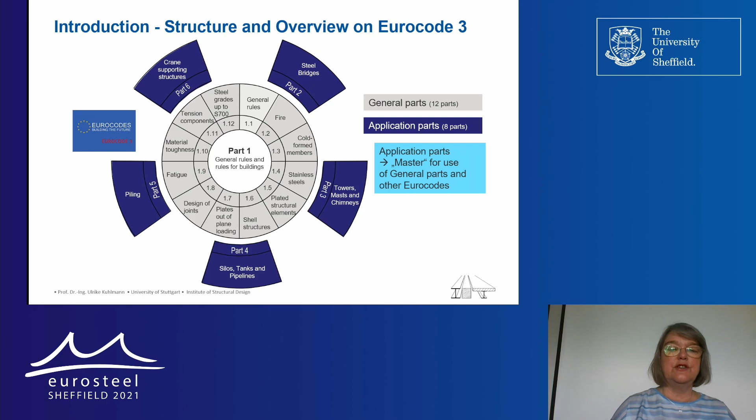This gives you an overview of the structure of the existing Eurocode 3. There are 12 general parts, for example part 1.1 on member stability, or part 1.8 on design of joints. And there are 8 application parts, for example part 2 for steel bridges. The application parts form a kind of master for the use of the general parts and of other Eurocodes, such as Eurocode 1 for loading.

Let's come to the aims of the revision, and this, of course, not only for Eurocode 3, but for all Eurocodes. First of all, we want to include the latest developments, that is, new materials, new products, new methods, and new market requirements, and for that it needs an extension of the existing rules. Secondly, we aim at improvement and harmonization of existing rules. This is expressed by the term reduction of nationally determined parameters, or NDP.

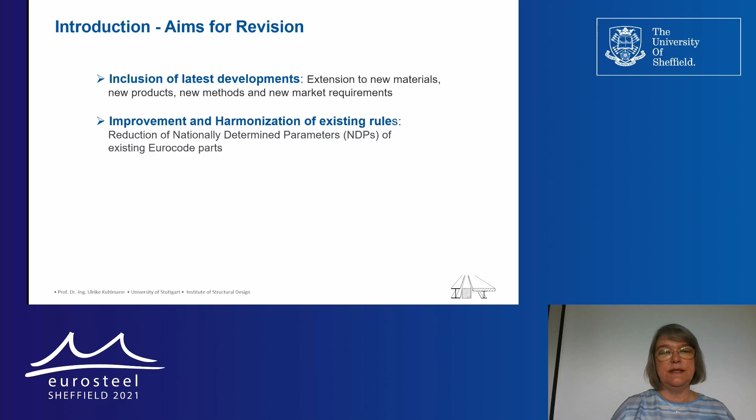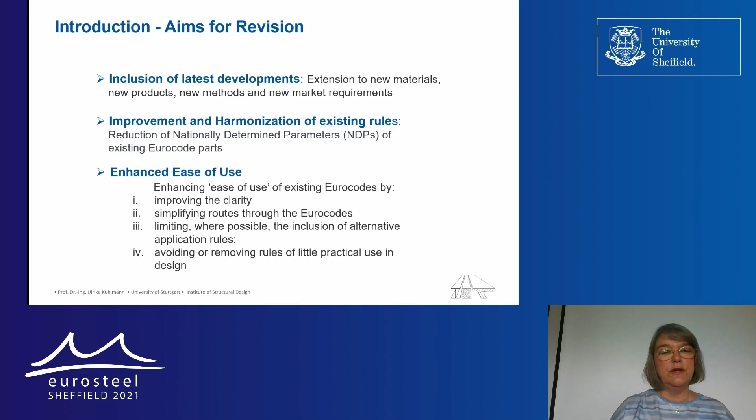And thirdly, and I think this may be the most important one, we want to achieve an enhanced ease of use of the existing Eurocodes. For example, by improving the clarity, by simplifying the routes through the Eurocodes, limiting where possible the inclusion of alternative application rules, and avoiding or removing rules of little practical use in design.

Let me give you some examples. So the existing part 4.3 is on pipelines, and we have decided to withdraw this part. Why? There are many other EN standards for pipelines with more specific purposes, and it really seems that this standard is not much used.

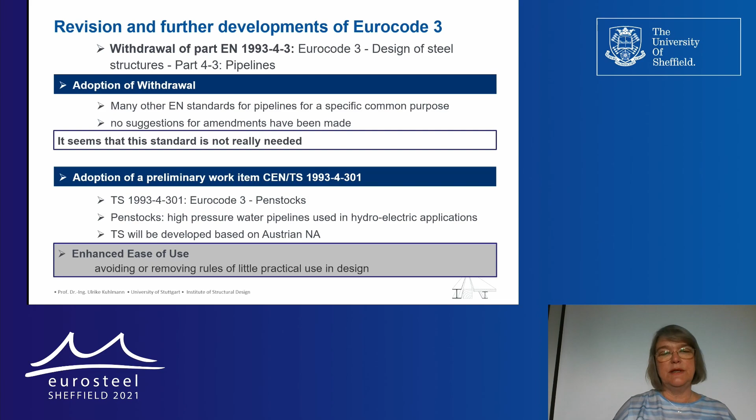However, when we decided to withdraw part 4.3, it was found out that there is at the moment a national annex from Austria where there is content which is really of use. The content concerns penstocks, high pressure water pipelines used in hydro-electric applications. This, of course, we try to keep, and for that we identified a technical specification to contain this new content. So we enhanced ease of use by avoiding or removing rules of little practical use, but at the same time we try to keep valuable content.

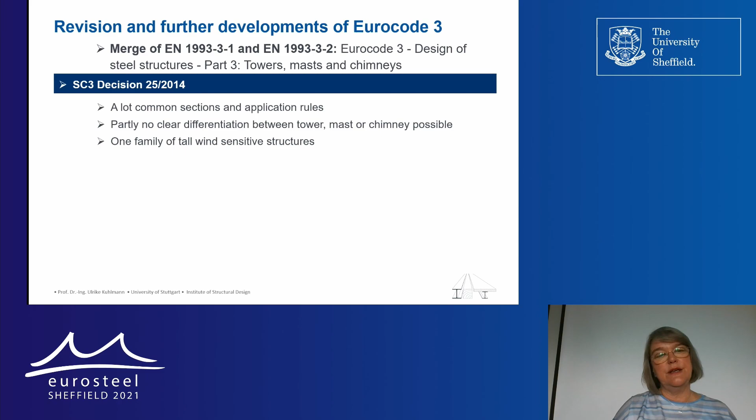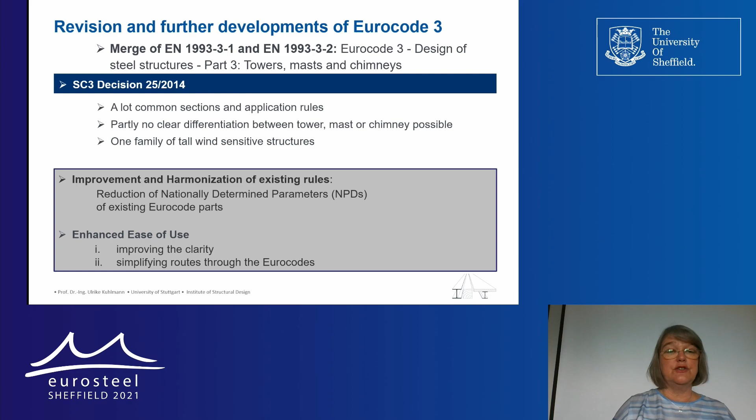Second example is the merge of Eurocode 3 part 3.1 and part 3.2. The idea is to have one single part: towers, masts, and chimneys. Why? There are a lot of common sections of these two parts, and it is not a clear differentiation between the tower, mast, and chimneys. So it makes much more sense to have one family of tall, wind-sensitive structures. This is, of course, an improvement and harmonization, also a reduction of nationally determined parameters, and an enhanced ease of use.

The third example concerns part 1.12. Part 1.12 at the moment gives additional rules for the extension of Eurocode 3 up to steel grade S700. We decided to dissolve part 1.12 and integrate the content into part 1.1, part 1.5, etc. So, for example, part 1.1 has been adapted with requirements on ductility and for plastic design, and there has been an extension of buckling curves. This is, for sure, again an improved clarity.

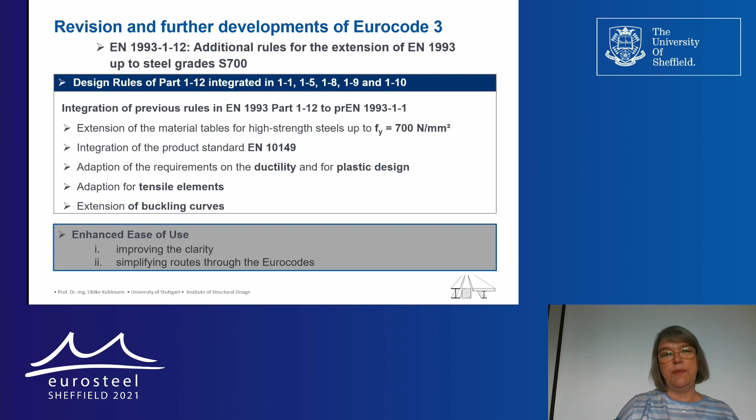However, when we had decided to dissolve part 1.12, we identified a new need. There is a new high-strength steel up to S960 where rules are missing. So we decided to have a new scope and a new title for Eurocode 3 Part 1.12, allowing for an extension of the rules for steel grades stronger than S700 and up to S960. With that, of course, we also allow for the latest developments, and we open the door really for this new material.

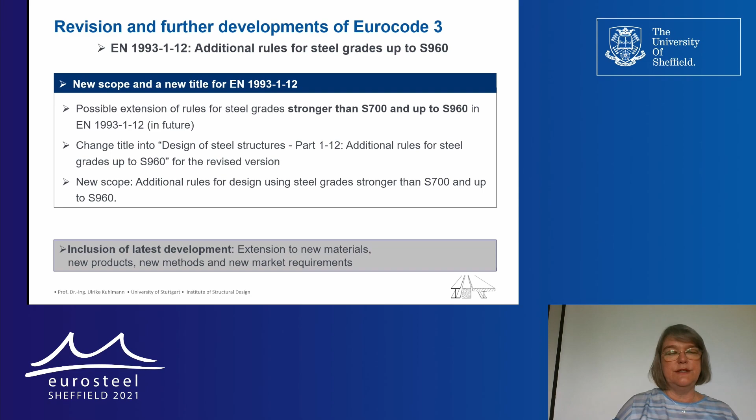Let me explain a little bit on the organization of Subcommittee 3. Subcommittee 3, within the family of TC250, is responsible for Eurocode 3, design of steel structures. Within Subcommittee 3, we have identified for each of the single parts of Eurocode 3 an individual working group.

So, for example, there is working group 1. Convener is Bert Snijder from the Netherlands, who deals with Eurocode 3 Part 1.1. Or there is working group 5 dealing with Eurocode 3 Part 1.5, and I'm convener of that. The task of this working group is technical clarification. The members of this working group are experts nominated by their individual national standardization bodies.

So what we achieve has two sides. On one side, we really gather for a certain subject the experts in Europe. And on the other side, as the experts are nominated by the national standardization body, we really also achieve acceptance in this country.

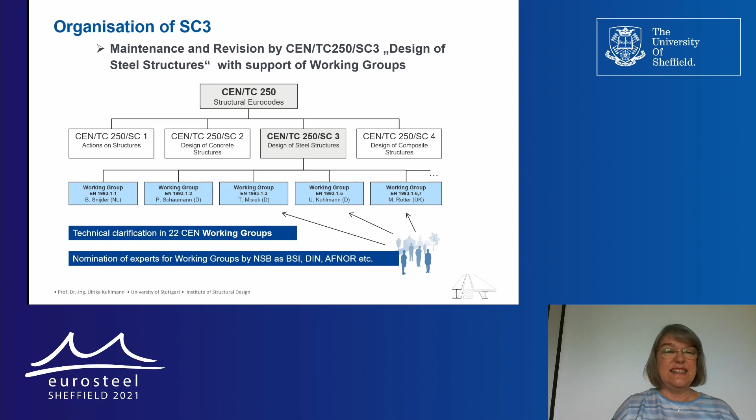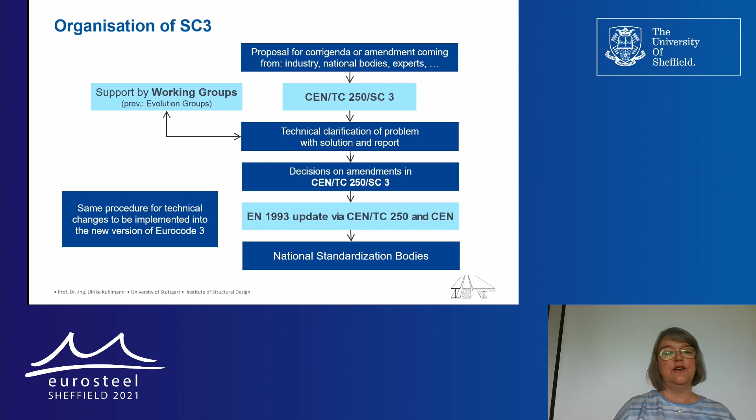So if a proposal for a corrigenda or an amendment comes to Subcommittee 3, then Subcommittee 3 gives that to the relevant working group. The relevant working group discusses this proposal and makes a recommendation. The recommendation is then finally decided in Subcommittee 3. And this same procedure is also done for all the technical changes to be implemented into the new version of Eurocode 3.

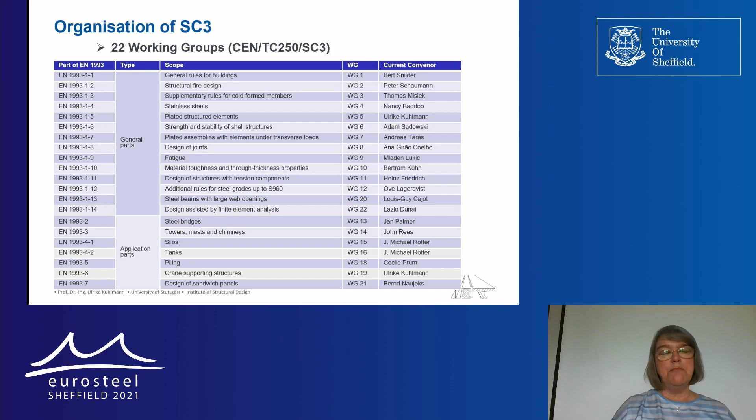This is our list of the 22 working groups. You see on the left hand the list of the single parts they are responsible for. There are general parts and application parts. The numbering is given on the right-hand side, along with the current convener.

Let me come to the general procedure for the revision of the Eurocodes. The existing Eurocodes, more or less the content, date from 2005. This is already quite a long time, so it makes absolute sense to have a general revision and maintenance of these parts.

There was a call for systematic review where the single countries could make proposals and ask for changes. And this systematic review has been elaborated on, or commented on, by the subcommittees and the relevant working groups. This is one side of the revision.

The other side consists of the mandate. So the Commission has given CEN a new mandate for the revision of the Eurocodes. So it's not only Eurocode 3, it's all the Eurocodes. The mandate number is M515. Within the mandate, contracts are given to project teams. Project teams consist of 5-6 experts from different countries, and they really develop the new text. They have a certain task, a contract, they even get a little bit of money, and they have a time for delivery.

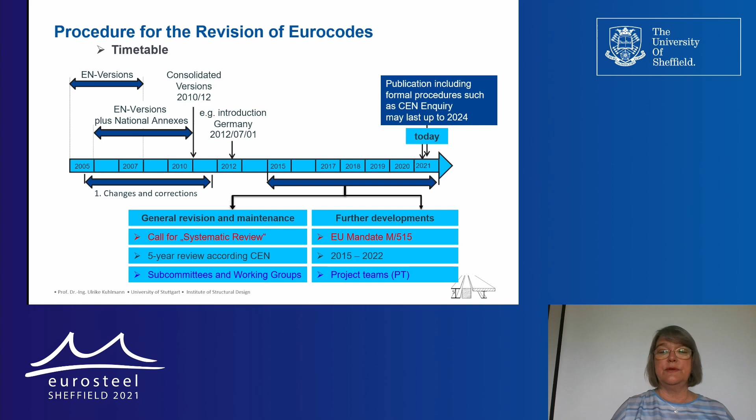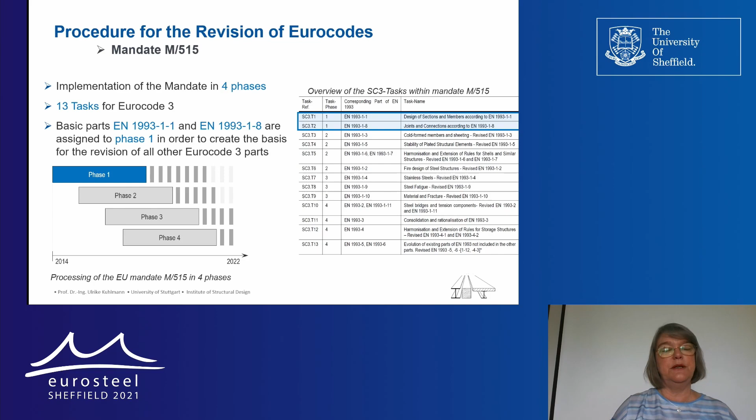Here you see the list of our project teams. There are 13 project teams altogether, and some of them are responsible for more than one part. You also see that these project teams belong to certain phases. The whole mandate is distributed across 4 phases. We on purpose decided to have Eurocode 3 Part 1.1 and Part 1.8, the basic parts, in phase 1, so that all the other coming parts know already what has been revised in Part 1.1 and Part 1.8. For example, for the application parts, which are in phase 4, it is really important that they do not repeat the general part, but can use what has been written in the general part.

For example, for Eurocode 3 Part 1.8, the project team finalized its work in March 2019. The subcommittee then tries to get a consensus on the content of this draft, modifies the draft, and finally gives it to TC 250 for the formal procedure.

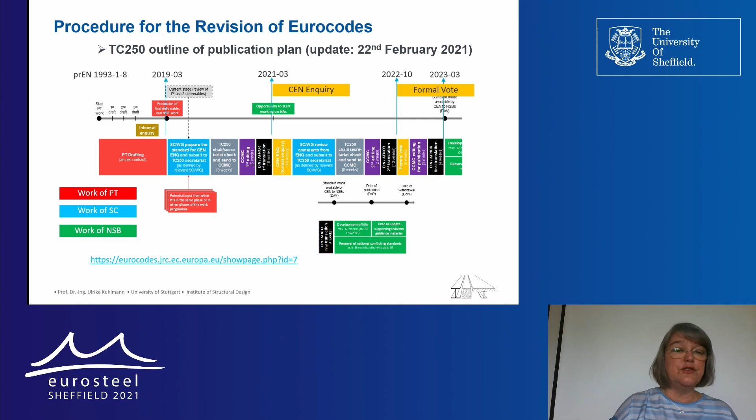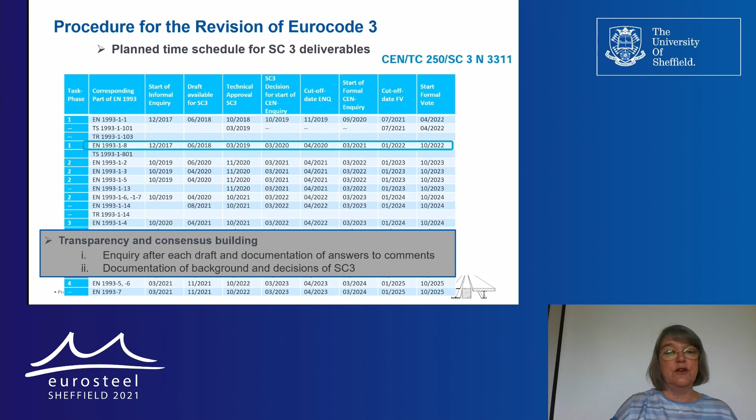This is an overview concerning all the deliverables within subcommittee 3, and you see here the timeline for Part 1.8, which I already showed. I think this is very helpful for all the revisions we have with the different drafts, with the different parts, and we also open for all the different parts the possibility to have an inquiry. So each draft has run through an inquiry or several inquiries, and there are answers to the comments which are documented.

So I think we have really a very good transparency through the whole process. It is documented not only the background by the project team, but also all the decisions within subcommittee 3. And by that, I think we really achieve the utmost consensus which is possible. So it needs quite a long time, yes, but by that I think we really get finally an agreed draft for the revision of Eurocode.

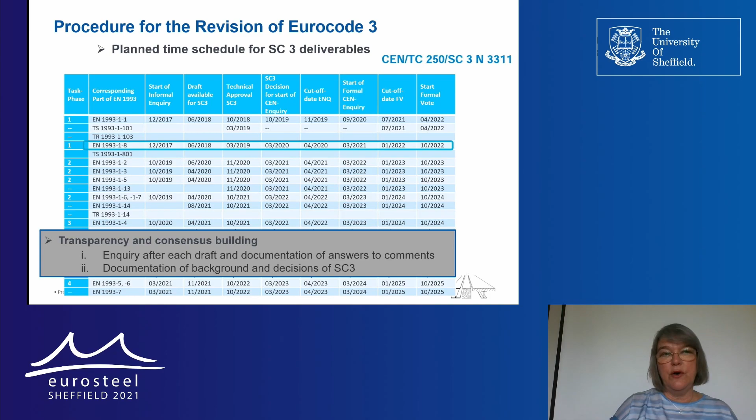Let's come to some more specific rules. I'd like to start with Eurocode 3 Part 1.1, General Rules and Rules for Building. This is the furthest in the whole procedure. So we had the CEN inquiry, we had comments from the CEN inquiry, they were answered and the draft was modified. And now we have a positive decision to send the draft to formal vote. Formal vote probably will be in April 2022.

So I will give you a short overview on the changes, but only a few. For me, it is very important that there is a certain simplification of the stability rules, and also that we achieved a unification of the rules between this general part and the application part. This is especially obvious for the rules of lateral torsional buckling.

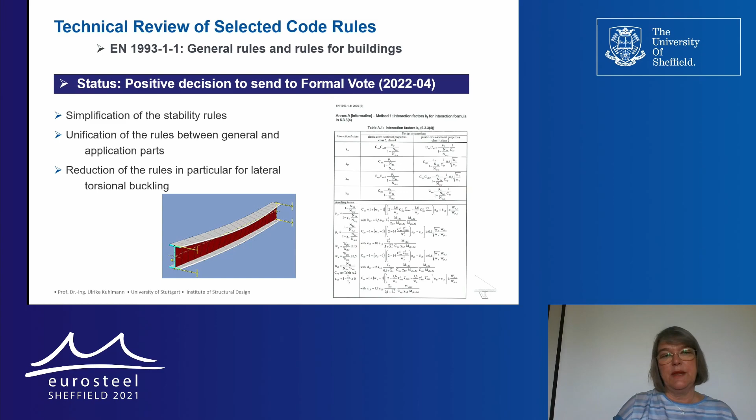You see here the famous Annex A. You know, in the existing code there was an Annex B. I originally counted about 7 different possibilities within our existing Eurocode 3 Part 1.1 to have a verification on lateral torsional buckling. And by a new development in this area, we really achieved a reduction of these numerous alternatives. I think about 3 are left over. So I think this is really a big improvement.

Very important in this is also that we define a certain method of analysis. This is what connects the calculation, the analysis, the calculation of stresses and internal forces, first order or second order, with a verification. And we identified 6 different methods. So there is method 0, which is the simplest one, only calculating first order theory, no imperfection, and a simple resistance verification. And these methods are ordered according to the complexity.

You see on the right-hand side this flow chart, and this gives the criteria to choose a different method. So, for example, the most complex method, M5, has a second-order analysis in plane and out of plane, including lateral torsional buckling and all imperfections, and then the verification. So I think this is really a clear improvement in view of clarity and simplifying rules.

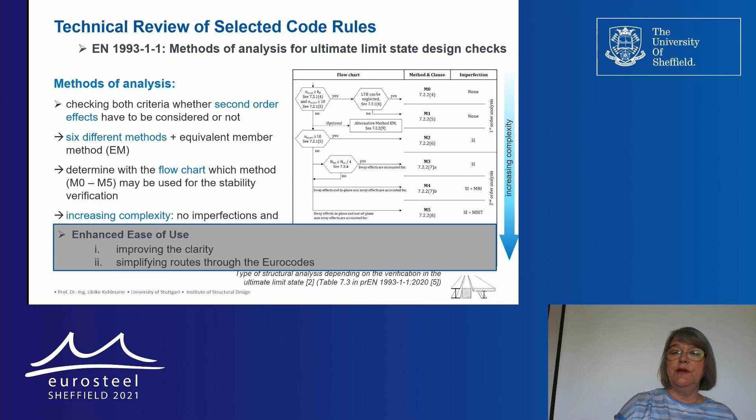Another new point in Part 1.1, which I think is of importance, especially in view of transparency and background, is this new Annex E, calibration of partial factors. It contains the most important assumptions and procedures on which the calibration of the partial factors for buildings is based. It is not intended to be used directly by practice, but it is meant for the mirror groups to decide on the partial factors.

It is based on a European research project, SAFEBRICTILE, which developed recommendations for the partial factors, but also developed the whole procedure, and it lays down the assumptions behind. So I think it really contributes to the transparency of the whole procedure.

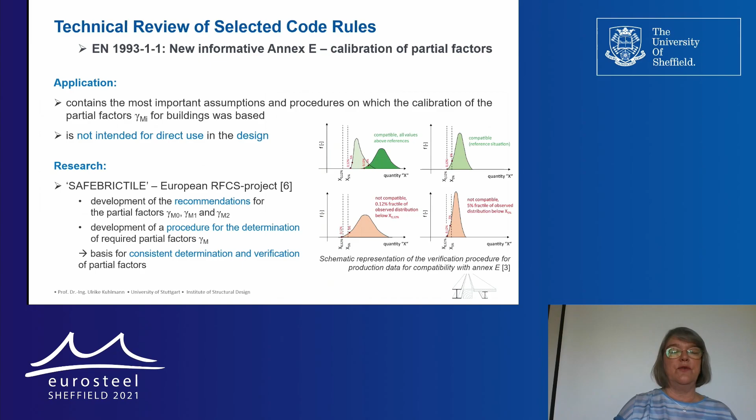So here you can see the assumed variability of the material properties as well as the assumed variability of the dimensional parameters, which are laid down as background. So any mirror group can decide whether they follow these assumptions and the partial factors or have their own input in that.

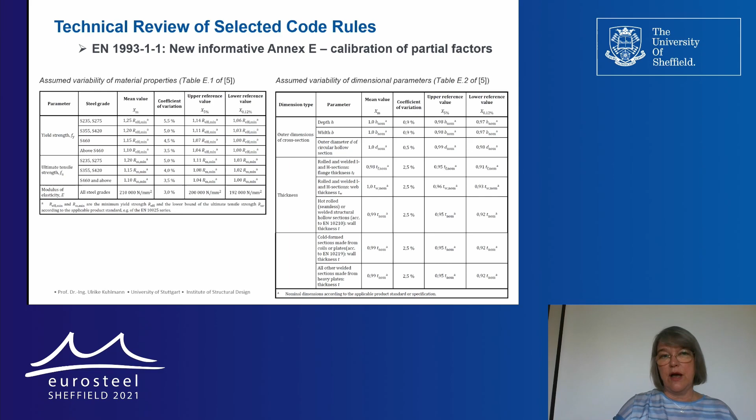Let's come to Eurocode 3 Part 1.8, design of joints. Here we have had really a 100% approval in the CEN inquiry, but about 700 comments, and it ended end of June this year. So now there is a reference group in working group A dealing with these comments, modifying the draft to be sent at the end also for formal vote.

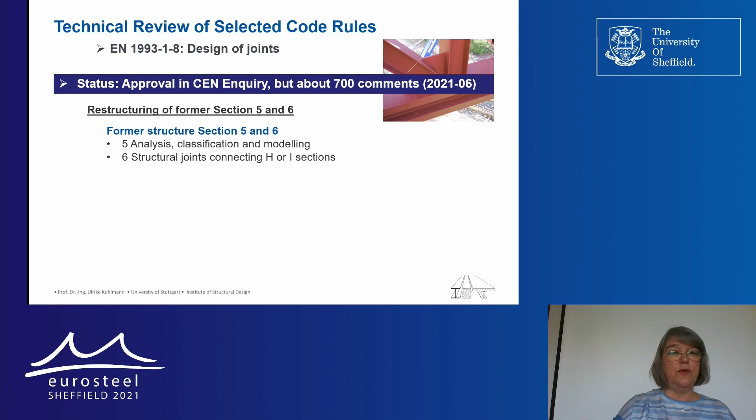Also here we try to have ease of use by restructuring the whole content. So the original section 5 and 6 were split into more general topics, which are now laid down in sections 7 and 8, and more specific content like, for example, resistance of the components or the stiffness of the components, which can be found now in the normative annexes as they are given here.

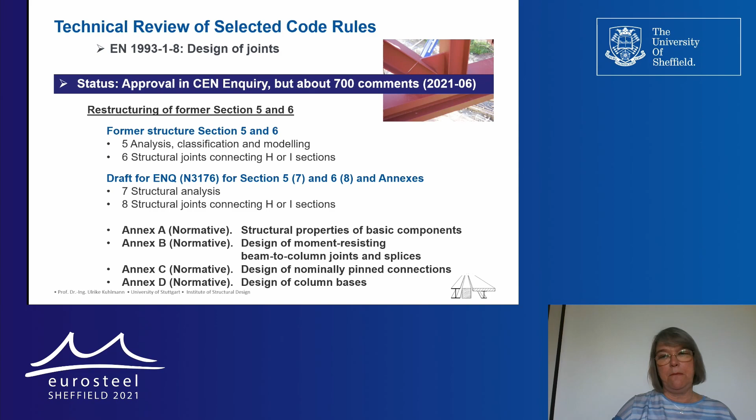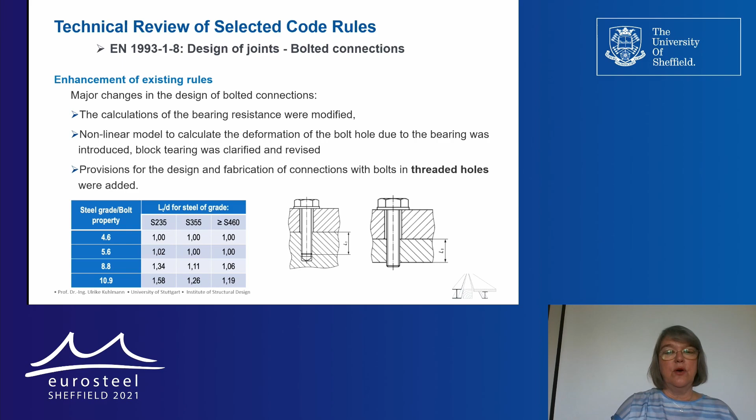We also have an enhancement of existing rules for Part 1.8, for example, concerning bolted connections. There is a new calculation of bearing resistance. There is a new nonlinear model to calculate the deformation of the bolt hole. And we also added rules for threaded holes, which were not in the existing code.

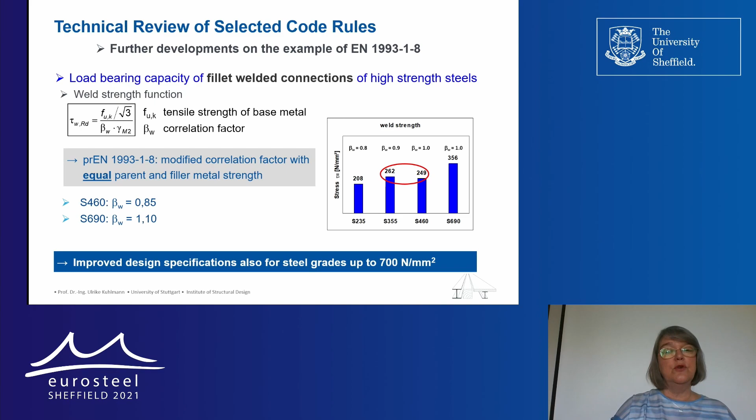Also for welded connections, there are new rules, especially in view of high-strength steel. So there are given new correlation factors for this high-strength steel, which achieve, as you can see here by the diagram, a much better resistance than at the moment. At the moment, we have, for example, S460 with a smaller resistance than S355, which is not very logical. So here really new information could be implemented.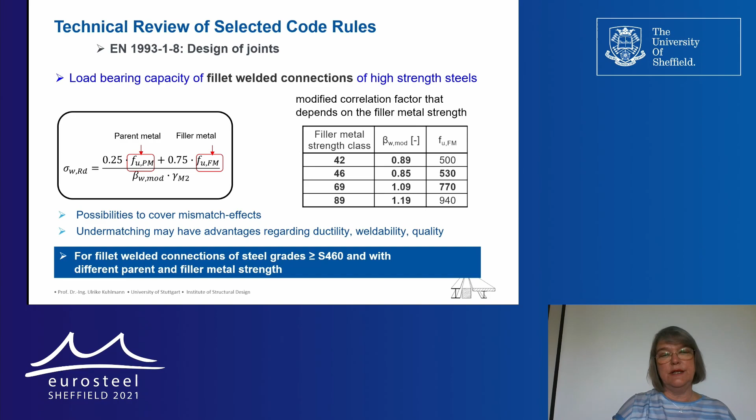We also now allow for clearly under-matching and over-matching connections, which is important for high-strength steel, by a new resistance which also considers the filler metal. So that is also new content, new information, and more possibilities for the future.

Let's come to Part 1.5, plated structures, so plated elements. Here we have fully accepted this procedure I explained at the beginning.

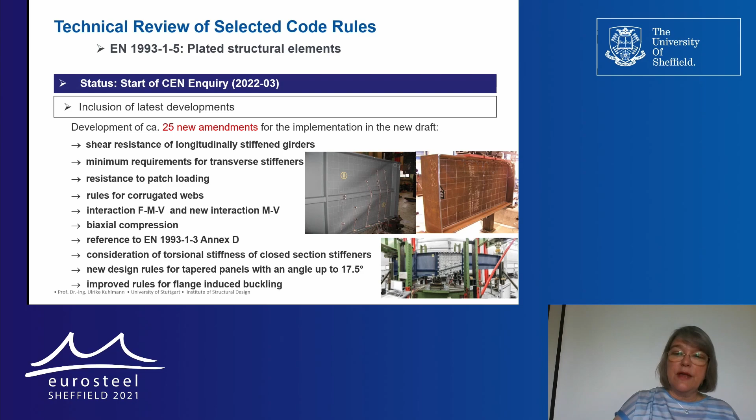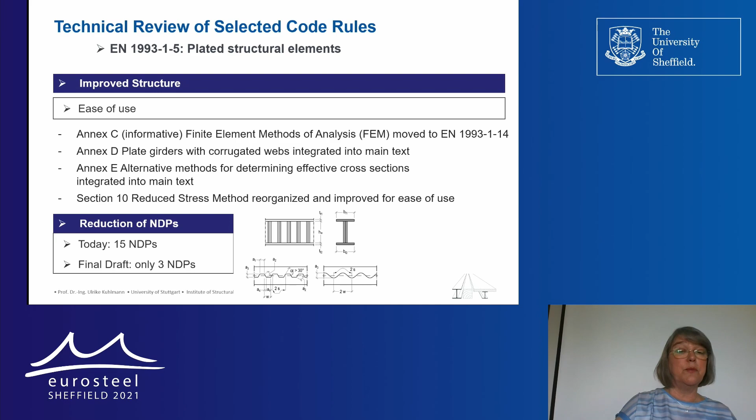The CEN Enquiry will start for Part 1.5 already, I think, in March next year. And also then I think we have the chance really to have an improved draft. So for example, in the improved structure, we try to implement the content of the different annexes into the main text. And we also achieved a really great reduction of the nationally determined parameters from 15 to only 3. This is, of course, a big achievement.

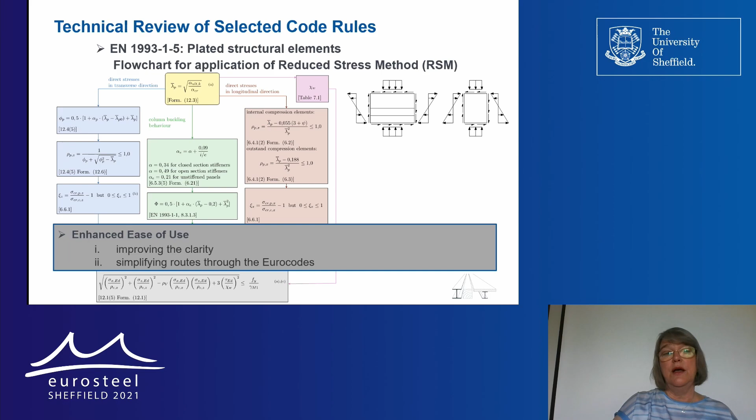Also concerning this reduced stress method, we improved very much. I must admit that at the moment, this method is only used in Germany or German-speaking countries, probably because what is written in Eurocode 3 Part 1.5 on this method is not very consistent and is not very clear. And if you do not have a German textbook on how to use this method, it becomes very difficult. We now have a complete restructuring of this section and a flowchart, as you can see here. So I think this really gives more clarity and allows the use of this method, which perhaps also in other countries may be found useful, because there are certain applications which can only be solved by this method.

Let's come to Part 1.9. Part 1.9, fatigue, is in phase 3. So here the project team has just finalized the document and their work. They handed over the document at the beginning of this month and also had a real big achievement in view of ease of use, more exact definitions, and harmonization with EN 1090 Part 2. They also improved the efficiency because there is now a distinction concerning the different notch effects.

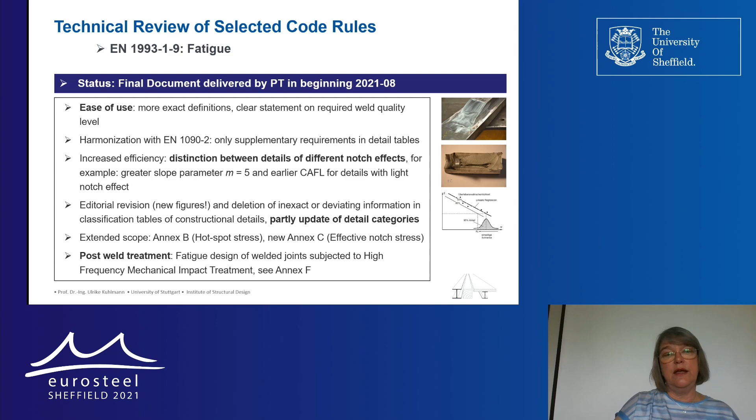So for light notch effects, we have an increased resistance. The figures were improved in the detail table. Also, the detail categories are partly updated. There is not only the nominal stress method anymore, but there is also an Annex B covering the hotspot stress method, and a new Annex C for the effective notch stresses. And we have a new annex dealing with post-weld treatment, high-frequency mechanical impact treatment. So we really tried also to open the gate for new developments.

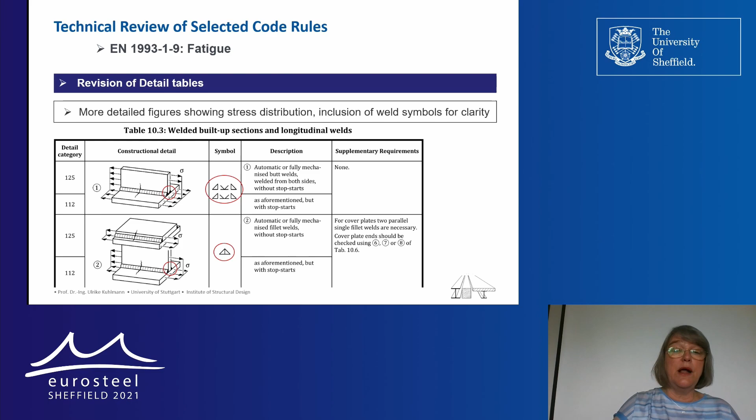Here is an example, I'd like to give you a flavor of what this new figure looks like. You clearly see it's much clearer. You see the stress distribution, and the weld symbols are included. So I think it's a real improvement we achieved.

As a last point, I'd like to come to a new Part 1-14, design assisted by finite element analysis. In fact, in some parts of Eurocode 3, this was already possible. There is at the moment an Annex C in Eurocode 3 Part 1.5, and the rules in Part 1.6, they allow for design assisted by finite elements or other numerical methods.

However, when we started the revision, other working groups and parts said they wanted this method included in their drafts. We decided to have one common Part 1-14, really covering all the basics for all the different applications. This was, for harmonization reasons, a very good step, so that everybody uses the same methods and expressions. It was drafted first by an ad hoc group, where the different working groups sent their representatives, and is now worked on further in working group 22, where all the countries have sent their experts.

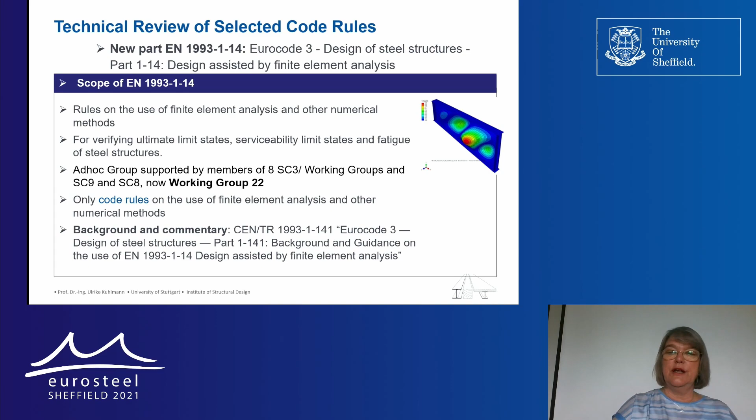They develop two documents, and I think this is an important point. They develop the pure code—only code rules are in the pure codes. It's about 50 pages, relatively short—and a technical report on the background and commentary. I think this is very important, because the background and commentary also helps you understand how to use these rules, for example by giving benchmarks for recalculation. I'd like to give you some insight into these features.

For me, a big advantage is that we now have a clear differentiation between validation and verification. Validation means comparing the model with real physical phenomena, and verification means checking how far the model approximates the real mathematical solution. These are two distinct issues, and I think it's important to make this differentiation, because not in all cases are both verification and validation necessary.

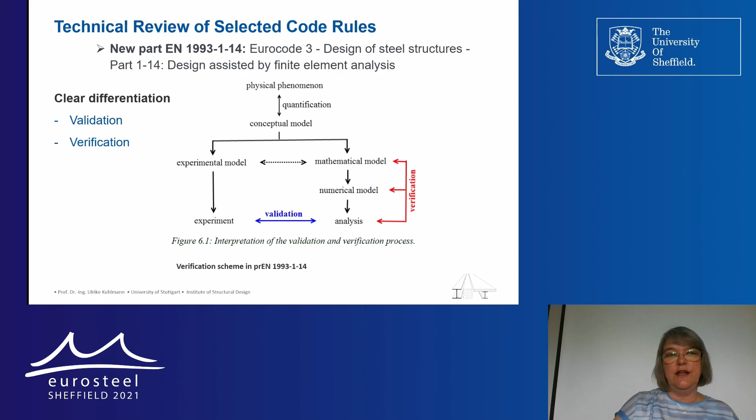Let's move to the next slide. Here, I think it's also very important that Part 1-14 covers very different analysis purposes and has a clear separation between them. On one hand there is numerical simulation, where, for example, with a complex model, tests are recalculated and further tests are replaced by a systematic parameter study using this numerical model. This typically leads to code rules and is not for everyday use. The basis of that is, of course, measured values if it concerns recalculation, or mean values and distributions.

On the other side, there is numerical design calculation, which is for everyday use, and this is based very clearly only on nominal values. We have, on one hand, what is done everywhere at the moment: using numerical tools to calculate internal stresses or internal forces, and then using them to make verification via the analytical rules of the application parts of Eurocode 3.

However, I think already now in some cases we also have this second link: a direct resistance check by a numerical model. In this case, within the numerical model, verification is done by comparing, for example, the strain or stress to a kind of limit value. Also in this case, we start off with nominal values.

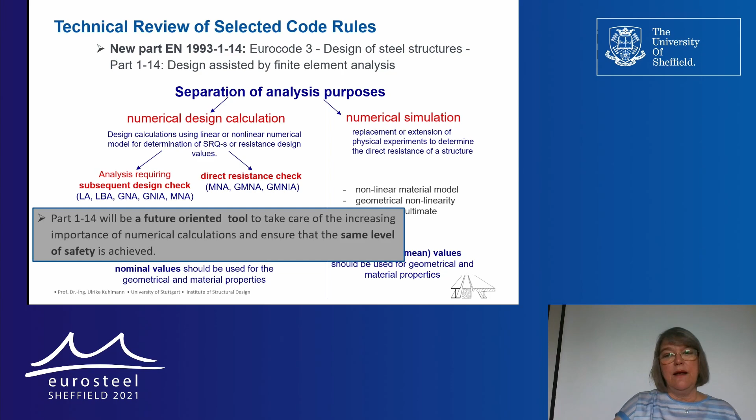So I think with Part 1-14, we will really have a future-oriented tool to take care of the increasing importance of numerical calculations, and ensure at the same time the same level of safety. I think this is a very important point.

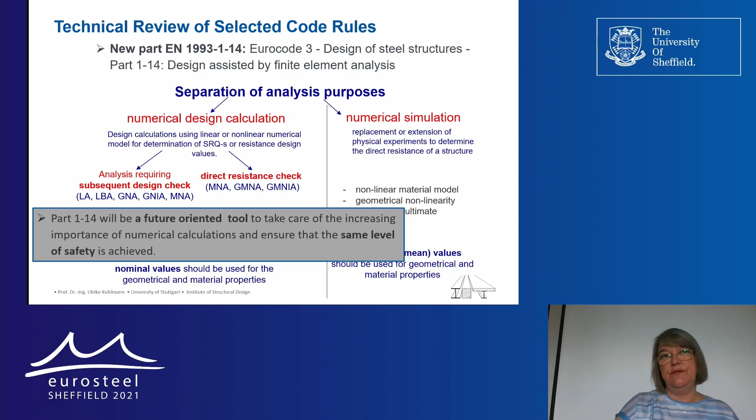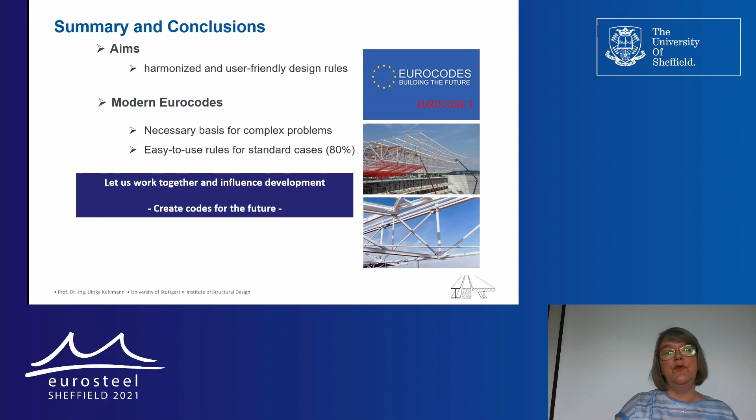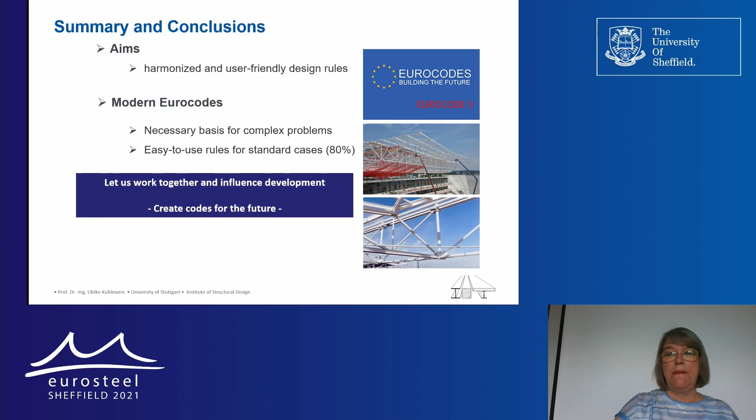Let me conclude. Our aims are to have, at the end, harmonized and user-friendly design rules, and ease of use especially for the standard cases, which I always call the 80% cases. But at the same time, we have to have the necessary basis for complex problems. Experience showed that we need input from practice, and through that input and comments, we can really improve the new codes. So let's work together, influence the development, and create codes for the future. Thank you for your attention.